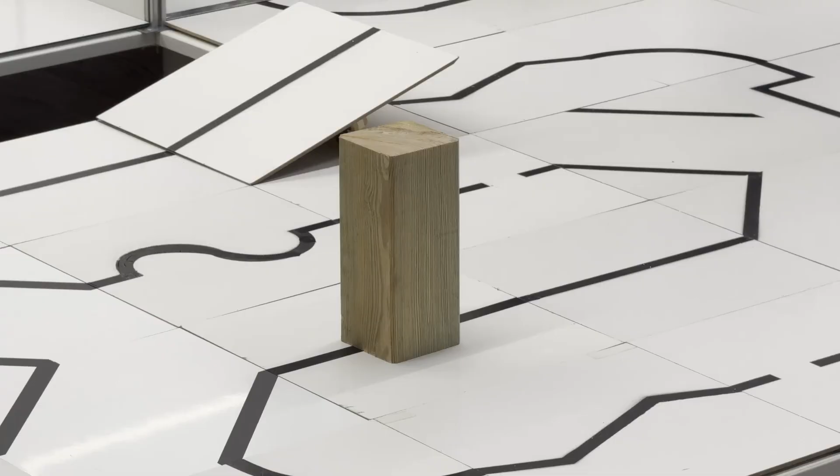This is RoboCup, a competition for junior engineers. It is a place to tinker, to connect with a vast community. Virtually no barrier to entry exists. You may build whatever you aspire, creating a robot that autonomously finds its way, conquers its obstacles, and achieves a dashing rescue of its victims.

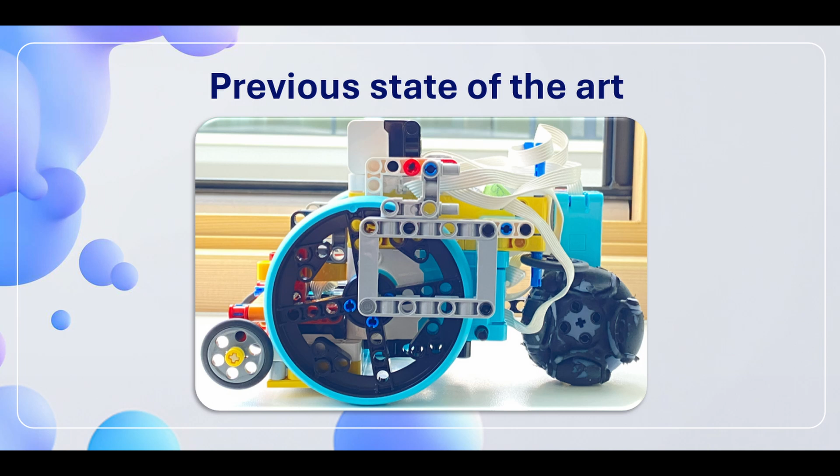We created iteration upon iteration of assembling our studs, bars, plates, axles, and Lego motors until we ran out of options, reaching the ceiling of what one Spike Prime brick may hoist. Lego hardware is limiting, for only a certain few sensors and actuators work with the platform. Most well-performing robots at an international level therefore used an Arduino platform. We followed suit in order for us to develop an even better robot.

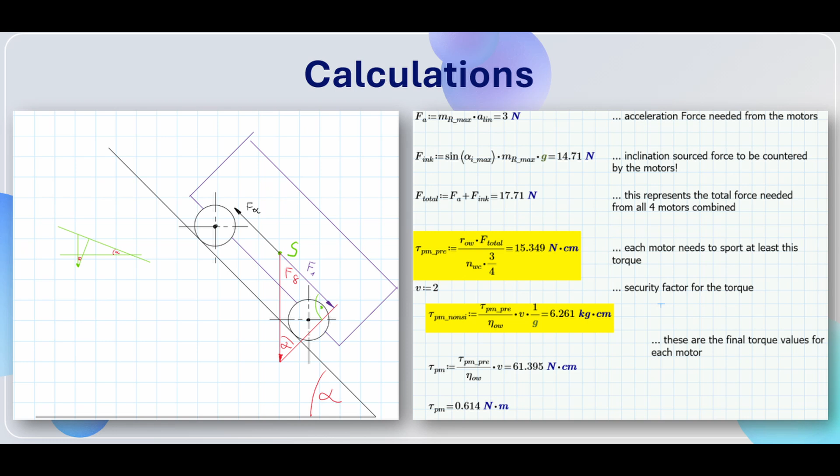First up was defining what hardware would be implemented. To choose a set of actuators, we needed the necessitated operational torque and corresponding RPM. Those values were evaluated by considering the worst case in which the motors need to perform and the highest necessary speed, respectively. After choosing the drivetrain components, sensors and actuators, designing a chassis to hold them was next.

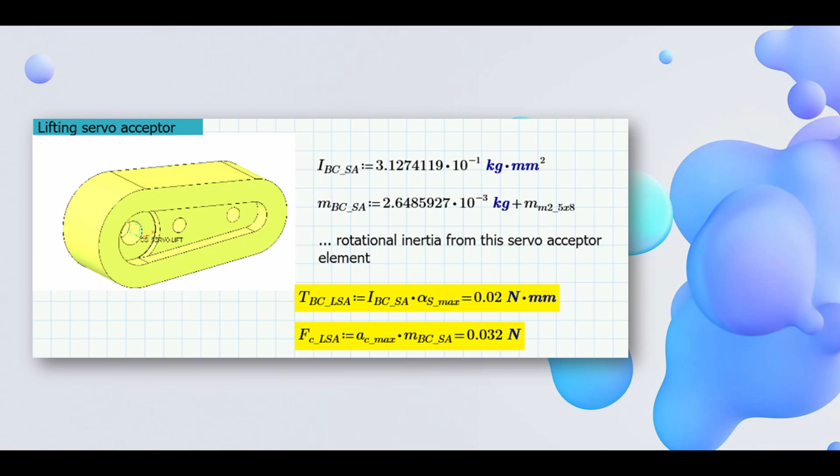We needed to know which other forces burdened the structural parts. The worst case would be a crash, face, side, or hind first into a brick wall. With a deceleration of around 1g and the respective mass each element has, forces result that predict the worst case for the robot. These stresses and strains help with fitting all the hardware into the smallest volume possible, with the least material used, and an ideal stress response, using generative design.

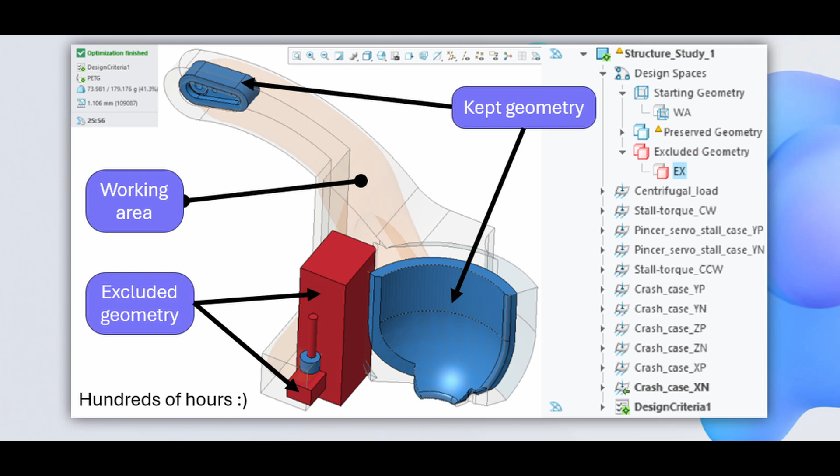Generative design is used to create highly efficient structures, utilizing finite element methods and machine learning. It reorders the individual elements it has at its disposal, continuously evaluating the structure's response, chasing a specified goal. The 4 studies of this robot, the chassis, magazine, lifting arm and couplings, each need constraints, load cases and design criteria. Together, the former 2 define fixtures and forces, while the design criteria limits the properties of the final solution and sets the optimization goal. Totaling hundreds of hours of babysitting the optimization solver net each a convergent solution.

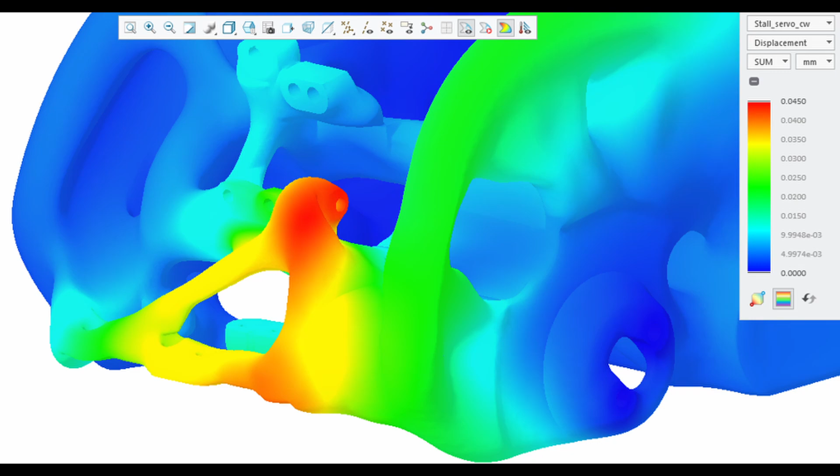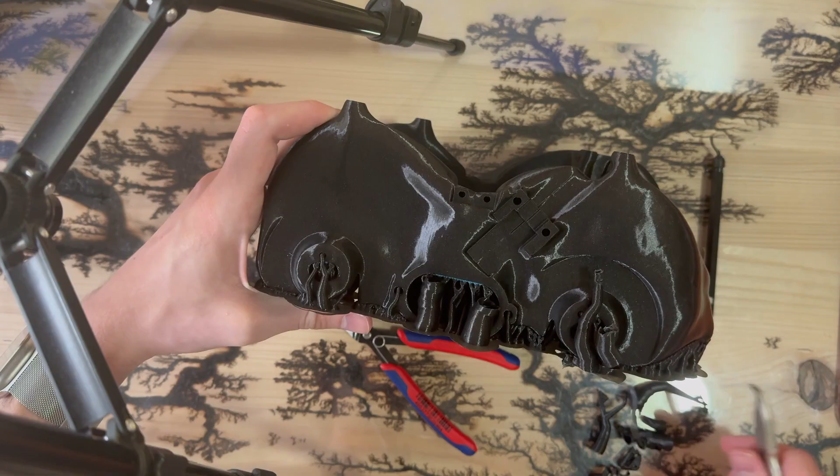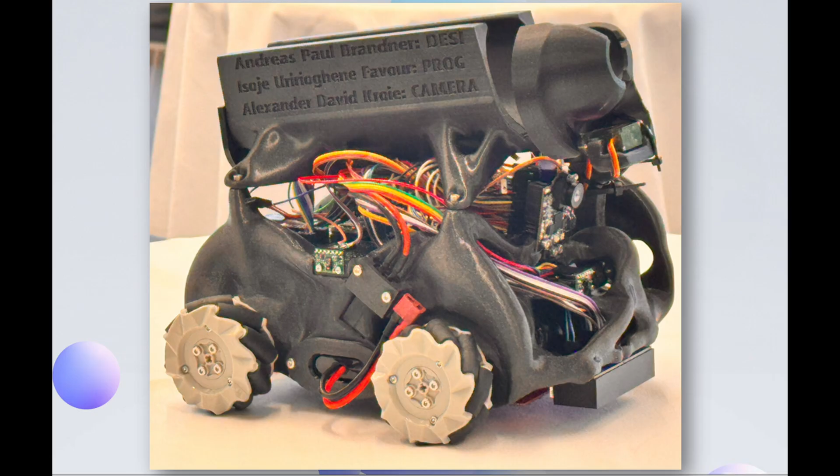All optimized parts were printed using a multi-tool FDM printer. Compared to SLS, FDM still needs support material. But printed at a sufficiently low layer height, these parts are quite satisfactory in quality and looks. One traditionally produced part completes the assembly: this flange disc made of aluminum. All this work, surprisingly little headaches, and 4 iterations later, we arrive at this.

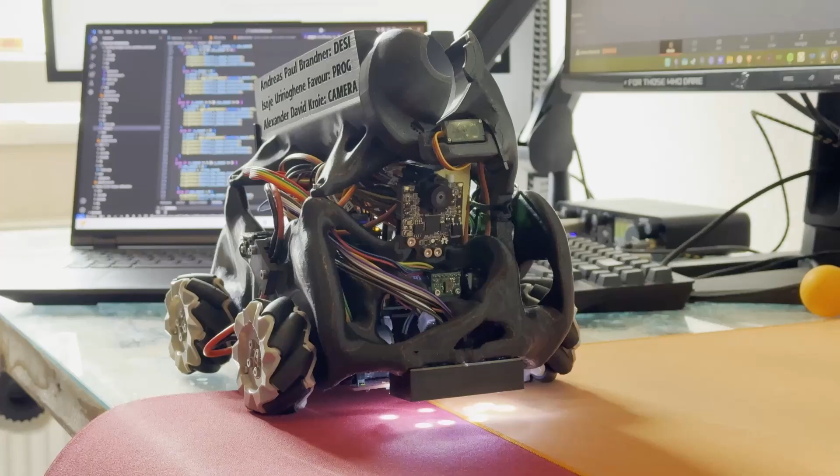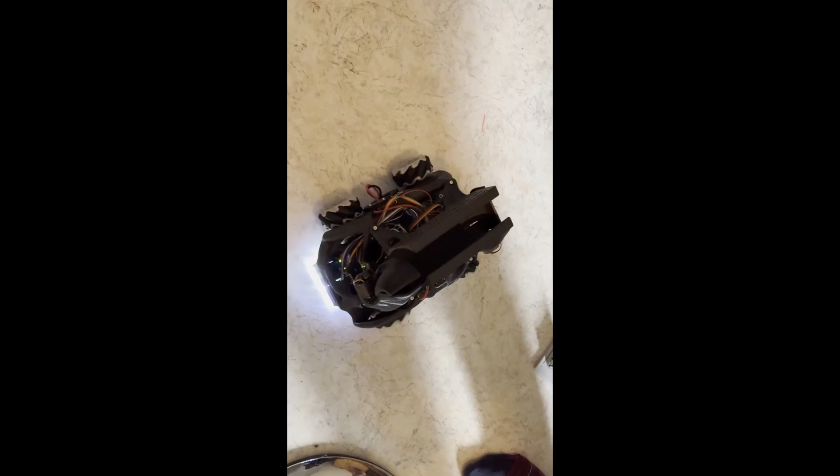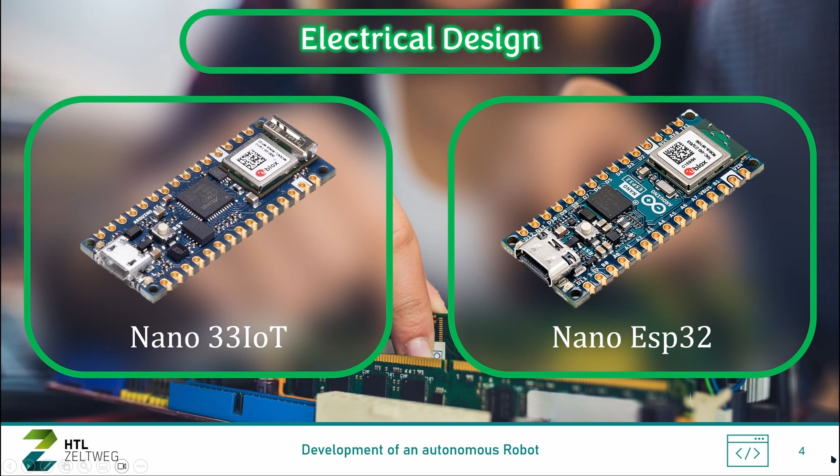Within the glamorous robot Hades lies its essential but unseen life force, the code. The program was crafted in a powerful albeit classic application, Visual Studio Code. Thus, as for this thesis, enabling the robot to perform different kinds of interesting movements that wouldn't have been possible without Mecanum wheels. The code is applied by 2 powerful Arduinos, the Nano 33 IoT and Nano ESP32, which both use the carefully selected electronical parts to wake Hades to life.

In our case, the extension PlatformIO enables the coding of the Arduinos and the implementation of the essential libraries needed to use sensors and actuators.

The programming paradigm I used for the code is functional programming. This brings many advantages in data processing, for which this paradigm is an ideal choice. This brings about numerous functions and subfunctions that acquire data, process these, and return outputs as values, or control actuators accordingly.

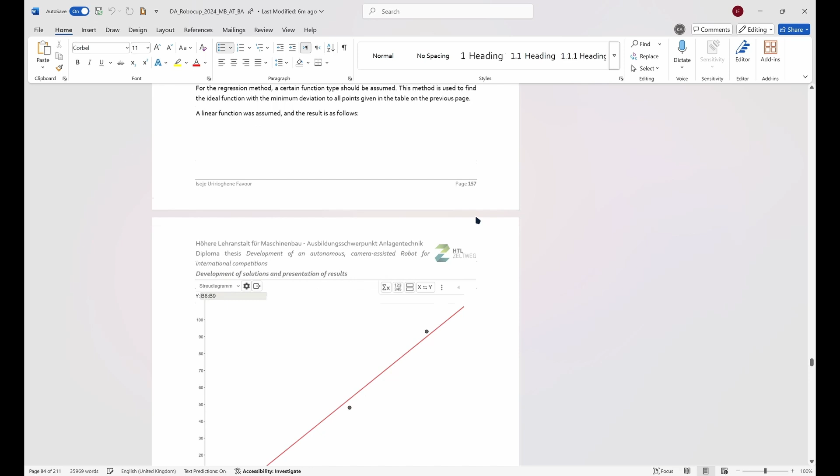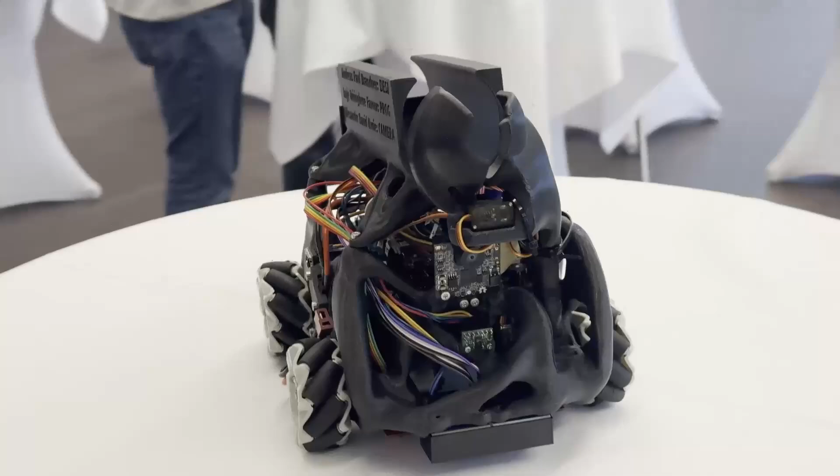These functions do rely a lot on mathematical equations which are well documented in our thesis. In this regard, the code for the servomotors and color sensors have been written but not yet fused into a single program. The incorporation of other sensors such as the line follow array, the camera, and the time of flight sensors will be worked on in the near future but are outside the scope of this thesis.